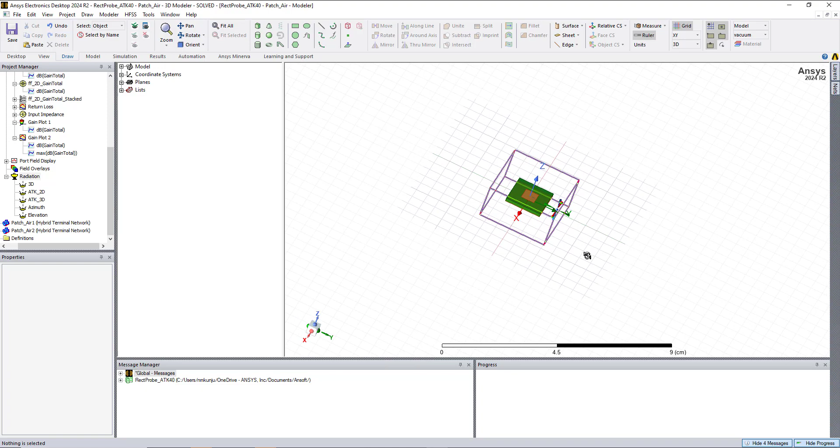Hi everyone. Today I'm going to show the method to plot the envelope of a radiation pattern, or it can be used for any kind of a plot.

For example, I have an antenna which has a nice radiation pattern working at 15 gigahertz, and I wanted to make an antenna array out of it. So using the pattern multiplication method, I can implement that.

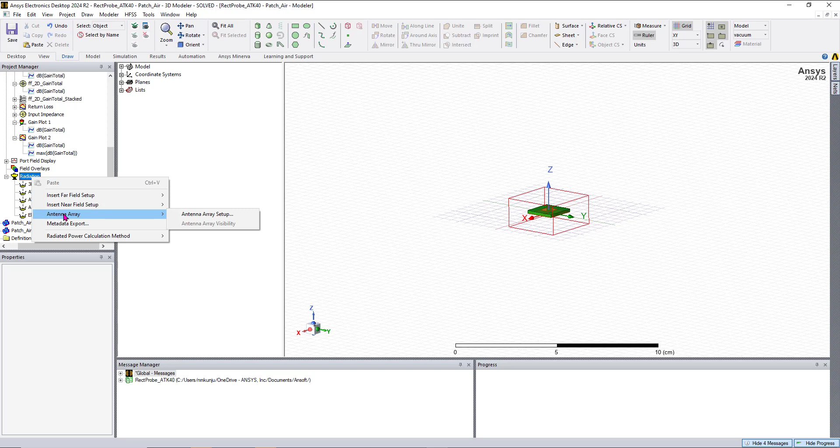So what I'm going to do is set up the antenna array setup and select parametric antenna array and select here. I will specify my center frequency and I can tell how many elements or total length of the array, what is the spacing of the array in x and y direction. Here I can also mention which direction my beam has to be steered, and if I want some pattern tapering I can add it over here.

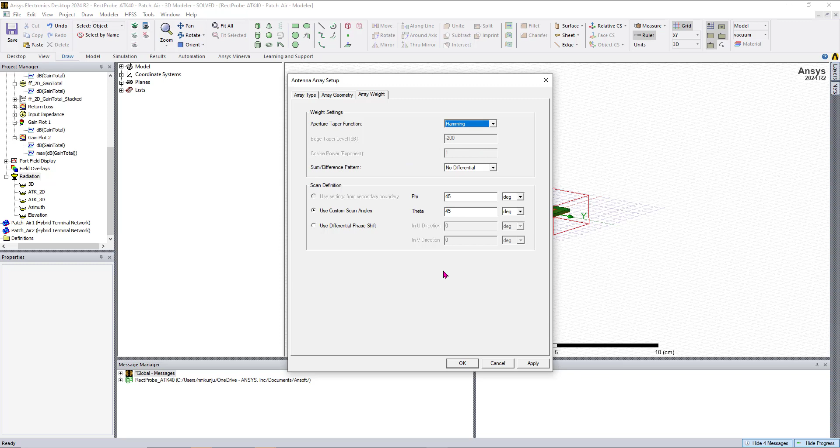Click OK, and if you would like to see how the array is going to look, click here. You can see every 0.5 lambda you will see something like this, and we can also see the radiation pattern is now changed.

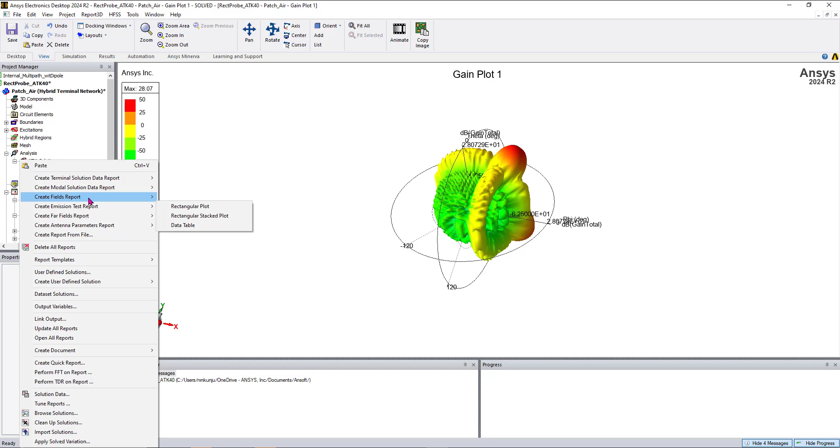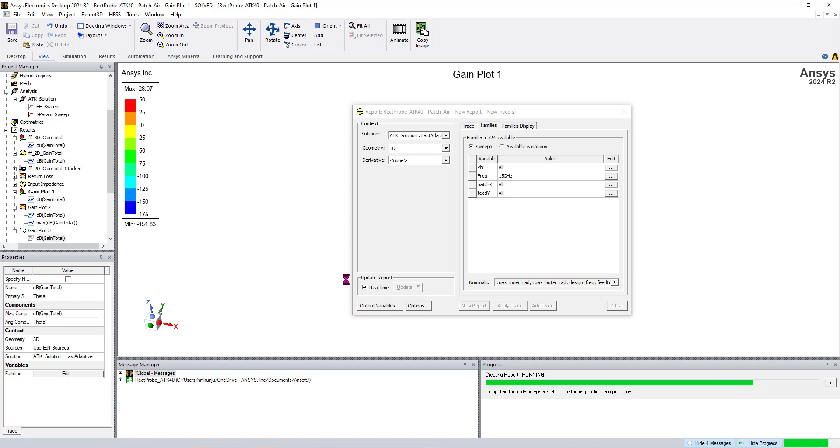The requirement is if I want to plot the radiation pattern, take this and plot it for all theta and for all phi at 15 gigahertz, it's going to look like this. So this is in 3D, sorry, radiation pattern mode.

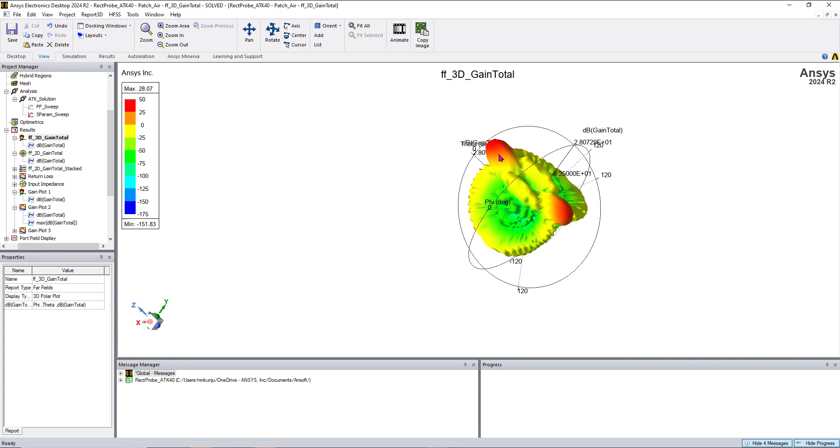If I change to rectangular pattern, you can clearly see how the radiation is coming. There are some angles, especially at 45 degrees, where there is a high gain. And because of this 3D, if you see here, it has another gain maximum, a grating lobe is also coming. And this will tell you, across the entire 360, in which direction what is the maximum gain.

And if I select this pattern, I can see this is going down all the way then coming up, but in some other direction there is a gain pattern with a good gain over here. So if somebody wants to take the envelope of the maximum on this radiation pattern, there is an easy way.

What I will do is select this and tell that this is my theta. I want to plot it over theta, x-axis is theta, but I want to take the maximum of all phi over the gain. So go to range and tell that I want to take max.

If you want to take different values, you can set one of these options and tell instead of theta, if I take one particular theta, I want to see for all phi which is maximum. So instead of theta, select phi, click OK, and add a new report. That will be easy. So it does the calculation.

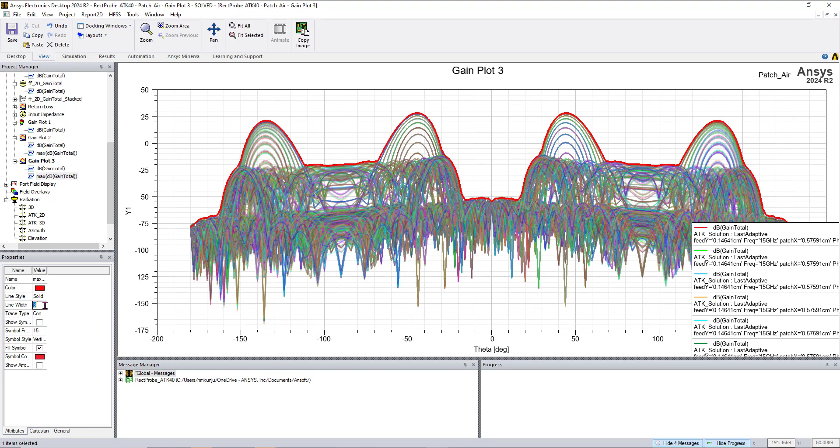And now you are getting a plot, which is the last one. You can see this is plotted. So let me do one thing. I'll change the color, and to make it more attractive, let me put the thickness. You can see this plot is now the envelope of the entire gain.

If I do this one and click new report, the same plot is coming here. This is coming with a different patch dimension, which we did for the array. And if somebody wants to see, you can use an X marker and just check what gain is coming out.

This is a way you can take the envelope of a pattern. It can be a radiation pattern or any pattern which is in the plot, you can extract it.